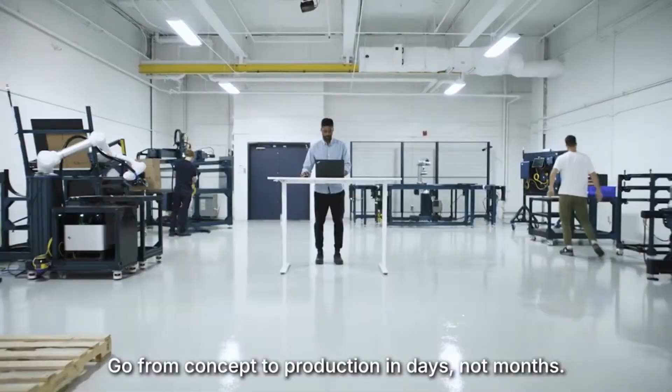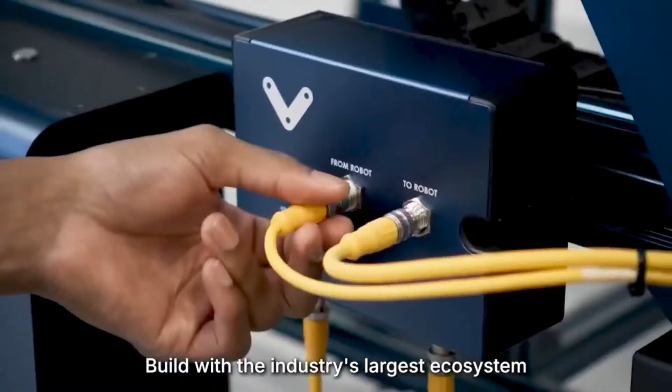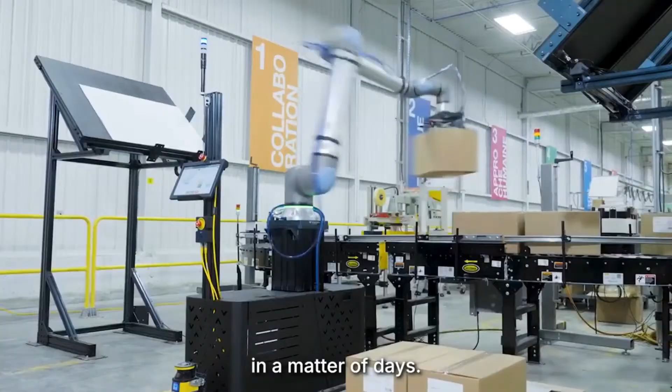When it comes to manufacturing, nobody automates faster than Vention. Design automated equipment right in your web browser. Go from concept to production in days, not months. Our drag and drop machine builder software allows you to design, program, simulate, and operate your system all in one seamless environment. Build with the industry's largest ecosystem of modular, plug-and-play parts, engineered for guaranteed compatibility. Or get started with a turnkey system, shipped pre-assembled and ready for operation in a matter of days. Trusted by more than 4,000 customers, big and small, worldwide, to boost productivity, cut costs, and drive scalable growth. Automate faster, scale smarter. Future-proof your business with Vention.

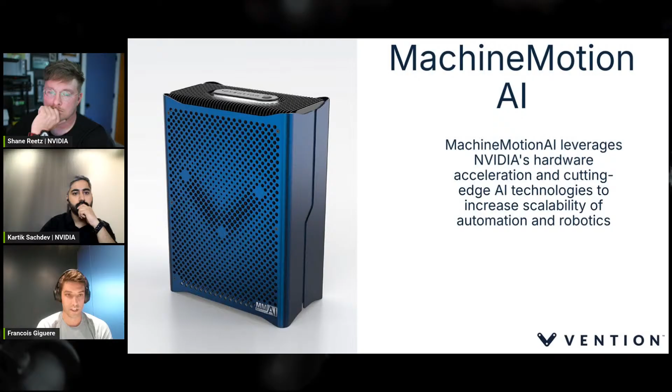If you go to the next slide, Shane, we'll see a little example of how the controller becomes the central part of a Vention system. We can connect robots, safety devices, IOs, motors. And the beautiful thing is you don't need to do complex engineering to make these things compatible.

It's a little bit like Lego Mindstorms, for those who know about it, or your Apple components at home that kind of seamlessly connect together. Everything is pre-configured, pre-discovered. You have software APIs for all these components, so it's very straightforward. That was our vision since the beginning, and we've made it more and more tangible and real as the business grew.

So with this 3rd generation, the special part is distributed motion control, but also the addition of GPUs. We partnered with NVIDIA early on the design of this new generation of the controller, and we brought in a Jetson NX 16 gig inside.

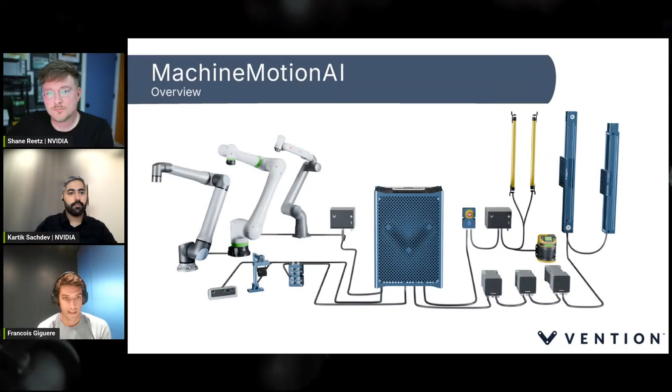If we go to the next slide, Shane, this little marvel of technology, about the size of a credit card, is now inside the controller. There's a lot of people that challenged me and challenged Etienne, our CEO, on why we were doing this. Some people say, oh, AI, it's just a trend, it's just to sound flashy. But what we wanted to do was simple.

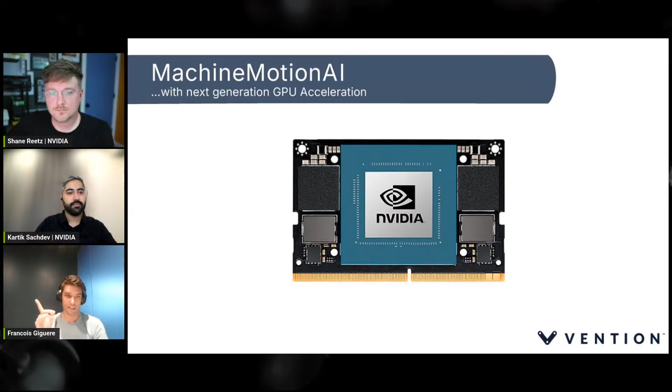It was to start to utilize AI to make the act of creating machines even simpler. And there's 3 things that we really wanted to push forward with this technology. The first two are about dexterity and perception - we want machines to perceive their environment much more easily, utilizing vision instead of, well, we made some crazy machines at Vention with like dozens of sensors to sense a part or which SKU was coming on a conveyor.

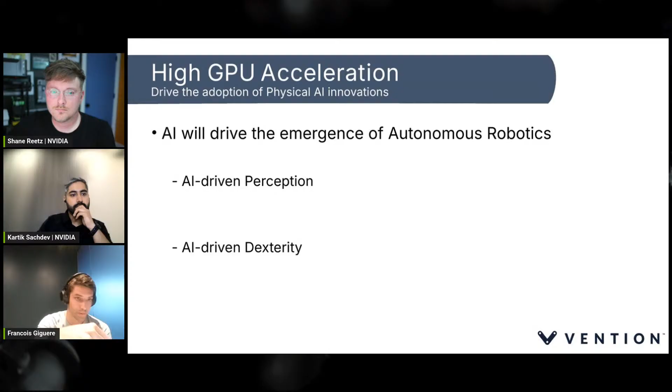But now with AI-driven perception, we can massively simplify things, right? We can simplify grippers, we can simplify mechanical staging devices and sensing. So AI-driven perception is one big thing that we wanted to push forward with GPU technology, GPU compute, and NVIDIA. And the other thing is dexterity, right? How do you go about picking a part? How do you position yourself to do so? So this is also another big field where we're pushing.

And if we go to the next slide, the other place where we really wanted to push is 3D-aware or context-aware motion planning. We don't want our customers to always have to create different routines depending on the SKU they manage, or depending on the context of the machine that day, or in a factory if there's a post. We don't necessarily want to always do something differently. So by leveraging cuMotion, a technology that was developed by NVIDIA, we can tell the robot, here's your 3D scene, go from this point to this point, and manage all the complexity that's in between these two points.

We were always of the philosophy that motion streaming is the right approach for the future, meaning that the controller of a system streams data points to a robot. And this ended up being very aligned with the technology that NVIDIA was building. So our technological strategies were really close cousins. So this was really seamless when the time came to leverage the technology.

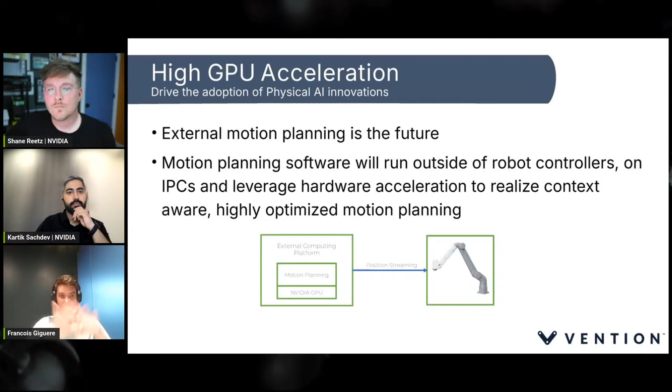So I just wanted to give an overview of Vention: low-cost machines, have them fast, make it easy, then put GPUs inside the central brain of the cell, and basically create perception simplicity, dexterity simplicity, and motion simplicity, right? This is where we're headed. And Jimmy, the fantastic scientist that joined us last year, will tell you more about exactly what type of technology we're taking from NVIDIA and putting inside our products to make this come to life.

Excellent. Yeah, and I'd just highlight for folks following along, if you hear us talking about this three-computer solution of physical AI, this is that third computer, right? This is the GPU at the edge. Absolutely. So you might use the DGX, we say, for training your model at a massive scale. You need like a supercomputer, and you're generating the models that are running these things. And then we have OVX running simulation, and then this is AGX. This is that edge, GPUs at the edge. So this is a really interesting combination of worlds with industrial automation and how do you get those resources at the edge.

So exactly. Kartik, are you going to show some of these technologies with Isaac Manipulator? Should we cover that next? Yes, why not? Now that you've talked about the three computers, here you can see we have the big cloud where we can train the foundation models. Some of them I already mentioned before, like FoundationStereo, FoundationPose. And also there's this GR00T model, which is a world foundation model for humanoids. So this is kind of like a cloud structure, maybe it can be on-prem, where you can train big models. It could be VLMs or LLMs, or any specific models.

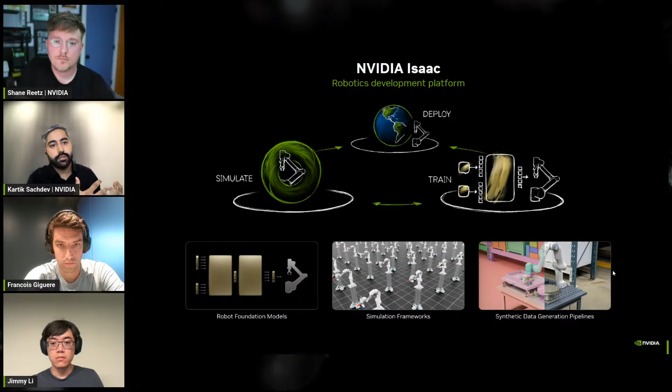So if you see, we have these foundation models, we have the simulation platform, and then augmenting it through synthetic data, we can really take these things to the next level. And that's one of the solutions that NVIDIA brings to the table on this front. So it's all a tandem, it's a loop. For instance, you trained a policy, then you want to evaluate in simulation how well it works before you actually deploy it. Once it meets your KPIs, then it's well and good. If not, you would do this loop again. So for this, we have these whole technologies.

So one of the applications which is also built is NVIDIA Isaac ROS. Basically, these are the CUDA-accelerated libraries and AI models that are freely available on GitHub. For instance, we have visual SLAM, 3D reconstruction, pose estimation, or object detection, and so on. These are all packages which are available on GitHub and via Isaac ROS.

Isaac ROS is built over the standard open source ROS framework with the CUDA-accelerated libraries there. These are all built on TensorRT, VPI, CUDA, Argus, and these drivers, and so on. To actually bring these models in a package, we have these reference architectures. For instance, Isaac Manipulator and Isaac Perceptor, and Vention here is one of the examples of Isaac Manipulator, wherein we are using these foundation models in actual deployment.

So let's see what Isaac Manipulator is. Basically, it's a reference workflow for autonomous manipulation, wherein we have 6D pose estimation and tracking. This is being delivered by FoundationPose that I've been mentioning since the start of my video. We also have a motion planning package, which is cuMotion. Then grasp identification, manipulation, and dexterity. All these packages come with Isaac ROS, or they're also available on our GitHub pages, and they can be deployed on our Jetson platform.

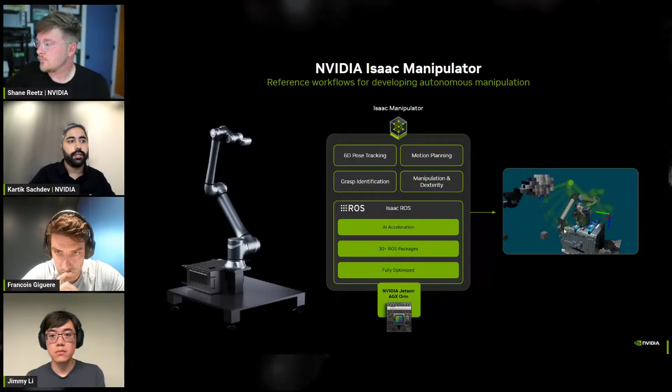Here you can see how these models actually look in the real world, wherein we have the manipulator doing a pick and place, for instance, and then it can do a 3D reconstruction of the scene.

So this is how the whole pick and place orchestration pipeline looks. We have the cameras. Maybe they could be in the real world, that's what we saw with Vention, or these cameras can actually be in a simulator, for instance, Isaac Sim. The moment the images from the cameras come, they go to the object detector. For that, we have SyntheticaDETR. This detects the object, meaning what kind of object it is, the type, for instance, if it's a metallic piece, like a blob, and so on.

Then it goes to the pose estimator as well, which predicts the 6D poses of the object in the real world. 6D pose means where exactly the object is with respect to the robot: the X, Y, Z, and the rotation about X, Y, Z as well. It also goes to the 3D reconstruction, which is called nvblox, and this reconstructs the whole scene, so what the surroundings of the robot look like.

So once these go there, we get what the object is. After this, we get the pose of the object. Once we have the pose, we command the robot to go and get the action done. That's how the whole pick and place pipeline, or architecture, looks. And all these things can be deployed on our Jetson platform, or on discrete GPUs.

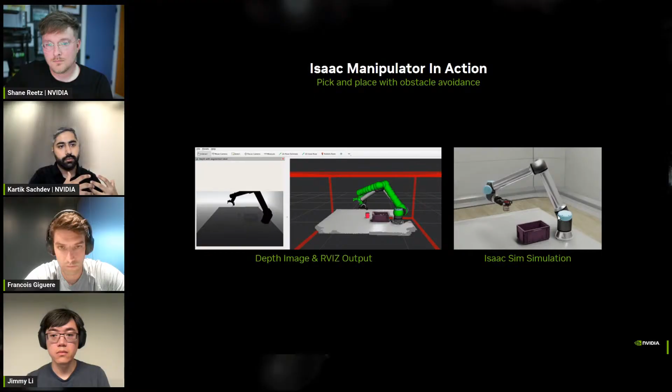So with all this information, like what I presented before with cuMotion, FoundationPose, FoundationStereo, and these libraries, we can get a feel of the environment, and then the robot goes there, grasps, and avoiding the boundaries of the box, places it inside the box. So that's how Isaac Sim works in tandem with RViz, or with any standard ROS framework.

And since these things have been exploding a lot, there are a lot of new things coming up very fast, very soon.

So we have a lot of courses, and also reference architectures, documentation, codes, so that we give the power to the hands of the developers to make great things from our reference architecture or the work that's already been done, instead of each developer building their own wheel. So, and why not? We have these tutorials, the concepts, and a lot of things.

And also there are developer forums wherein the developers are free to open up for discussions. If they have any feedback for us, feel free to give feedback on our libraries, on our tutorials, or on our packages. And there we can inculcate that. And that's how, let's say, it's a learning machine, and then we grow together. So talking about the courses, why not, Shane, you talk about some physical AI and robotics fundamentals that we have and we offer to the community there.

Yeah, sure. Well, first of all, I just want to say thanks so much for going over that. There's a lot to digest in that, but I think each step of that pipeline is like an interesting tool that's worth its own exploration. I mean, just foundation pose, being able to estimate the pose of an object in space, its position and orientation. There's so much you can do with that, and that's one part of it, right? So I think it's really worth taking a deep dive and looking into these.

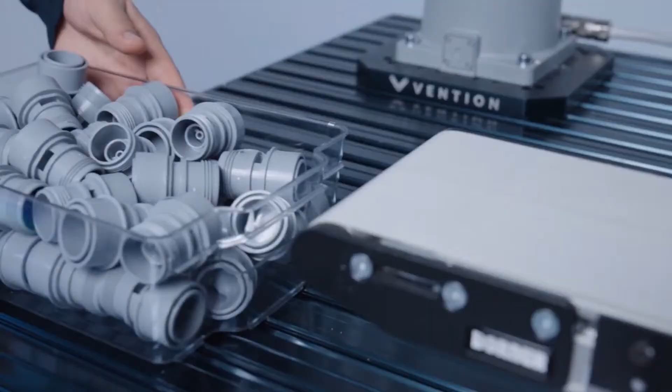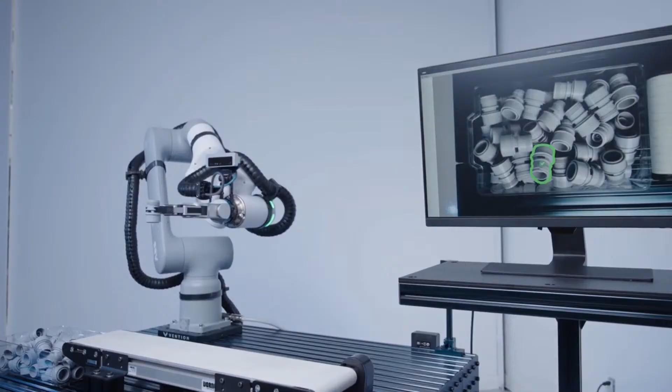I'd like to start by showing a video demo of something similar to what we presented at GTC this year. This was also shown at Automate and Automatica. So here you see a robot that is picking this gray part. It's a plumbing part from one of our potential clients. And as you can see, the parts are randomly placed inside a bin. And the robot is able to pick up these parts and place them in a structured way.

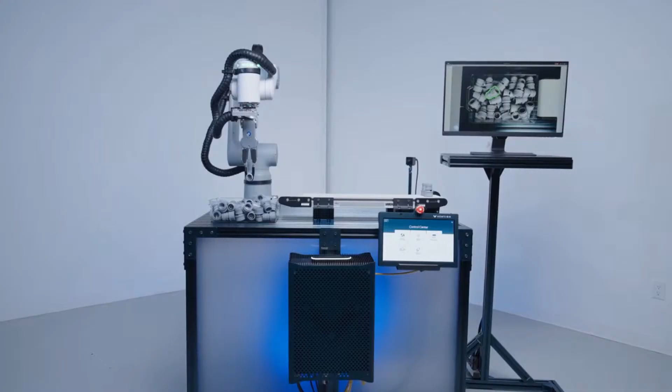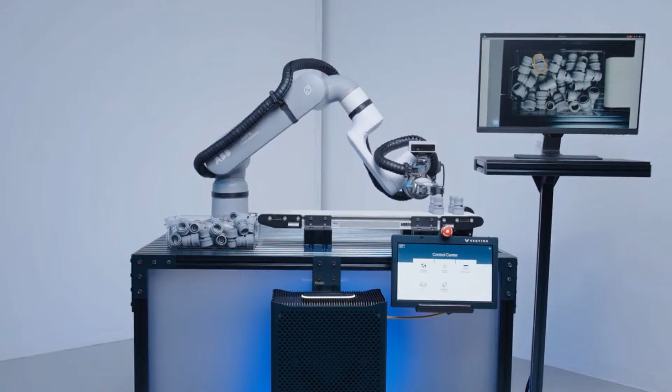So at the core of this demo is NVIDIA's foundation pose model, which enables us to use vision to estimate the pose of these objects in 3D space. And there's a camera that's mounted on the wrist of the robot, which is used to see the objects in the bin. By the way, when I say the word pose, what I mean is the rotation and the translation of the objects. And for this demo, all the processing is happening on board Vention's MachineMotion AI controller with the NVIDIA Orin NX.

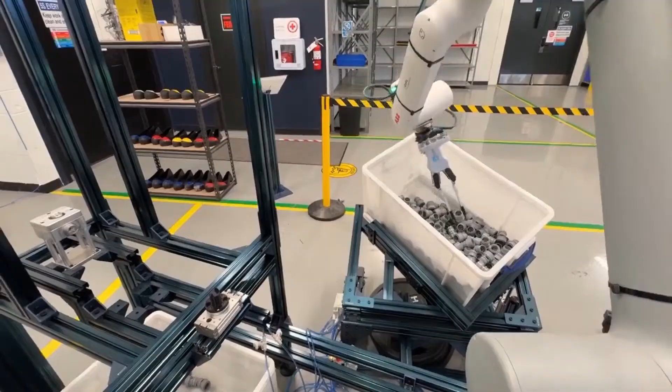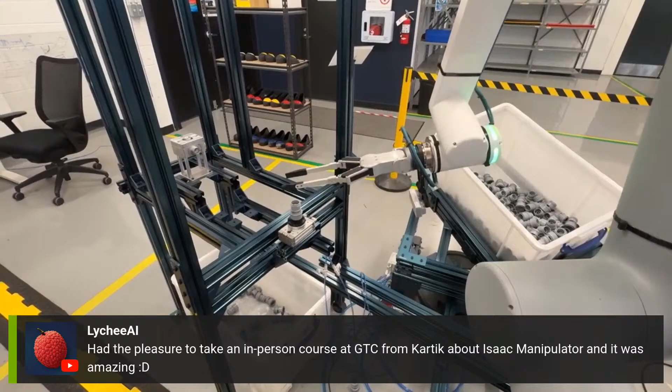Okay, so that was just a demo. So next, I have another video of the actual cell. So this is a test cell that is built with the same dimensions as the real cell at our customer site. And what you see here is a bigger robot. It still has a camera that's mounted on the wrist, but there are some key differences here. So first, you see that we have a very deep bin, and this poses a lot of challenges. Because there's a very deep bin and the robot's hand, its gripper, is quite big, we need to be able to avoid collisions with the bin. That's very important.

And one other thing that you'll notice is that now, compared to the demo, every single time we pick up the part, we're holding the part slightly differently. And because of that, the way we place it is also different every single time. And this is important because when we're picking from a deep bin like this, there are a lot of constraints that we have to work with, right? We have to not hit the bin. And then also depending on how the part is oriented in the bin, not all the grasps are available. And on top of that, we have to pick it in a way such that we can actually place it in the way that we want.

So the strategy here is for every object, we have a large pool of candidate grasps that the robot can use. And then depending on the situation, the robot will make a smart decision about which of those picks to use.

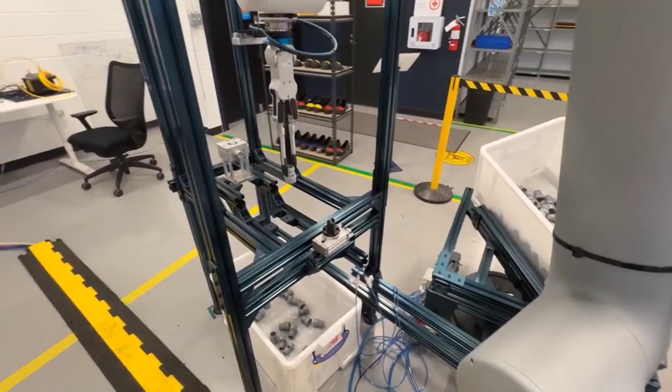Right, so next, do you have the longer version of the video, Shane, that we can play? Let me see here. Got a long version of the demo I'll show. Awesome, thank you. Let's pick up at the end, yeah, this is where it was ending.

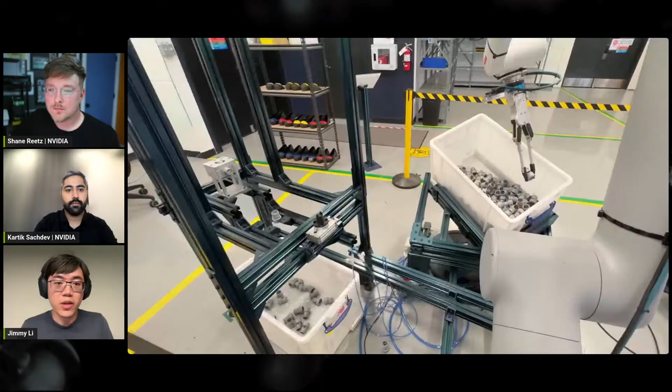Okay, great. So this is a very long 24-minute run of the robot just picking this part. Just now I think we saw the first 3 minutes, but this is the full length of the video. We won't watch all of it, but we'll watch it while I talk about this cell.

Okay, so another thing you'll notice is that we have this regrip station. By the way, the regrip station is that black thing there, and now the robot is about to put it on the regrip station. Yeah, now it's on the regrip station.

So the reason we need this is that there's very limited space inside the enclosure for the final receptacle that we have to place it into. And so the only way for the robot's arm to fit into this enclosure is to pick it from the top. That's why we went with a regrip station.

And this regrip station is actually performing another role, which is that when the part is placed on it, there's a mechanism that rotates the part and turns it so it has a consistent clocking. This is important because to finally insert it into the receptacle, the part needs to have a correct clocking.

So in this video, oh yeah, this is the shaking of the bin. Whenever the robot fails to pick a part, we actually shake the bin just to mix it up and expose a different set of potential grasps that the robot can then consider.

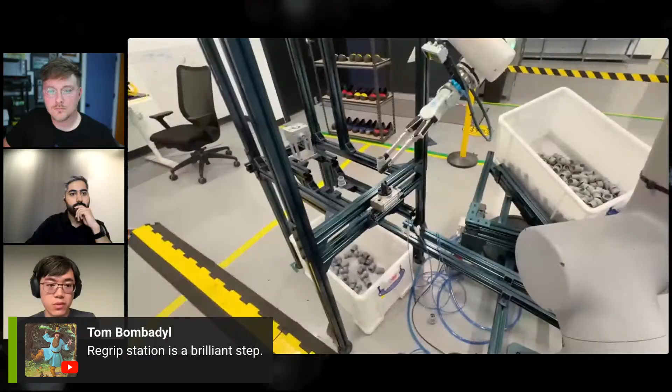Now here we actually take it back out and drop it into a bin below, and that's just for testing purposes. For the real deployment at the customer site, once the part is placed inside the receptacle, the whole receptacle will actually move away for the next processing step, and a new empty receptacle will come into that position, so the robot can then put the next part in.

Wow, I mean, I know we said we weren't going to watch the whole video, but I think I could watch the whole video. This is really, really fascinating. I haven't tried this kind of thing. I mean, this is a difficult problem. That bin is not, as Jimmy mentioned, it's deep. You have all these objects just tossed in there in different orientations, and it's dynamically figuring out how to pick these up. I just need to emphasize how wild that is. And I could just watch this all day, but please go on, Jimmy.

Yeah, so I just wanted to mention that random bin picking is one of the toughest problems to solve in the manipulator ecosystem. Because if you see, most industries have a very organized or semi-organized way of placed objects, where they want to pick it. But the real problem and the real challenge really comes when you have random parts, and this is a very common scenario in industry. So solving a very hard problem definitely takes time, but if you have the right partnership, you can really take these things to the next level. Whenever I see this demo, it's really impressive. So yeah, over to you, Jimmy.

Just wanted to add this thing. Actually, if I can butt in with a small question, do you know what would be needed to take this from this particular part to a different part? Like, let's say you get a longer version of those connectors, what would be needed to change this behavior?

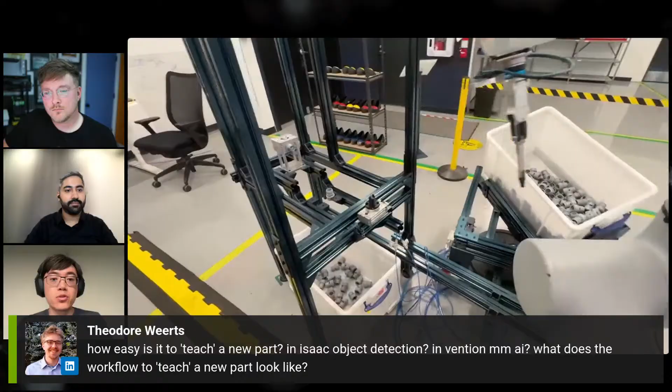Right now we're testing with these plastic fingers, and sometimes they'll break. Let's say we try to grab one part, but there's a nearby part, and the finger goes into the barrel of the part that's nearby, and that could lead to an unsafe collision. So that's still a problem we're actively working on.

So now to come back to your question, Shane. If the parts in the bin have certain physical properties that don't cause too much problems, then it could be quite easy. And the cool thing with these foundation models like Foundation Pose is that we don't have to train it on a new part. All we have to do is provide it with a new CAD model of that part, and right away it's able to detect it. The only other thing we'd have to do is program some of the grasps.

And we are exploring ways to automatically generate those grasps based on a CAD model, and I know NVIDIA is also doing work on that. In the past, there have been cases where it only took us a day to onboard a completely new part, and that's once again due to these foundation models not needing to train.

Now, where it can get hard is that because we haven't fully solved this dexterous grasping problem, let's say you give us some other kind of part with physical properties such that it's very hard to squeeze your fingers in between parts. Maybe the parts are very heavy, or such that when you put your fingers in, they don't naturally spread out. Then we could run into problems. I'd say that's still kind of an open research problem that we don't yet have a great solution for.

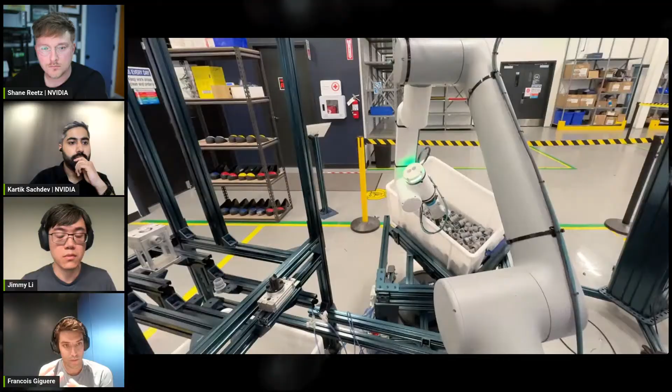The other portion is we see a path to automating grasp planning. We're not there yet, like Jimmy said, but we truly believe that with the tools we have, including the second simulation computer, we can get to a point where for each new part you add, you don't have to reteach the valid grasp points. You can have an automated, simulatable step for this. So you go from a world where you need to choose every grasp, train every part, and refine with field data, to a world where grasps are automatic and adding an object is as simple as uploading a CAD into the pipeline. This is really a game changer, aligned with faster to market, lower cost, and more straightforward.

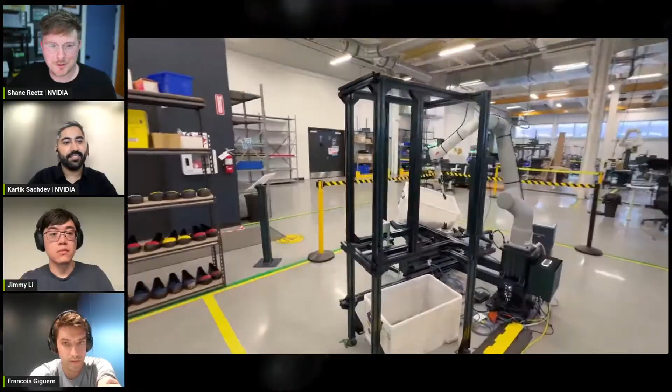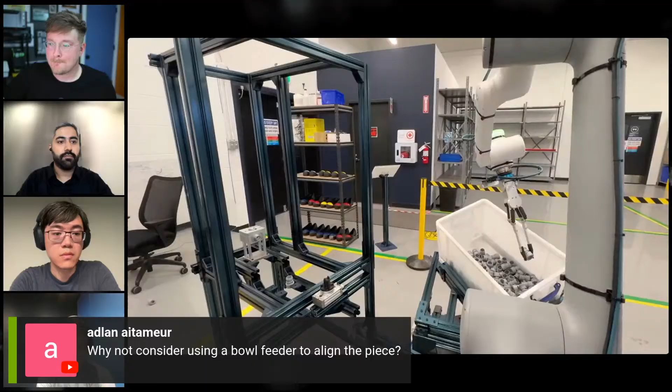Comparing this with traditional robotics, this would be difficult—it'd be a huge reprogramming effort to make something like this work with a new part. A gentleman in the comments was talking about bowl feeders. Bowl feeders are great, they've been used for decades, and they're effective, but highly inflexible. If you're machining millions of bolts a day, it makes sense for the volume, but the situations we encounter in our customer base always involve a new part—the SKU mix is very varied. So having a bowl feeder is difficult for a very large SKU count. You need something much more flexible, which is the type of solution we're showcasing here.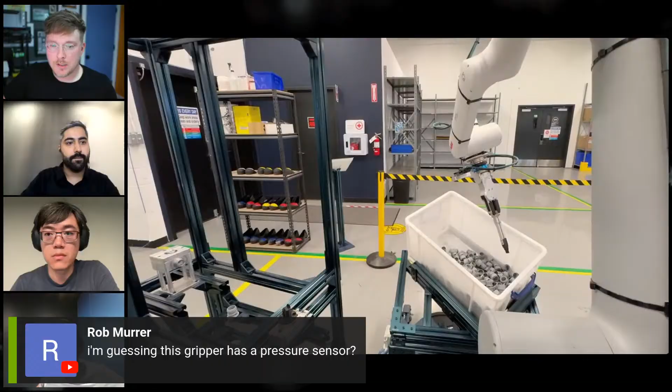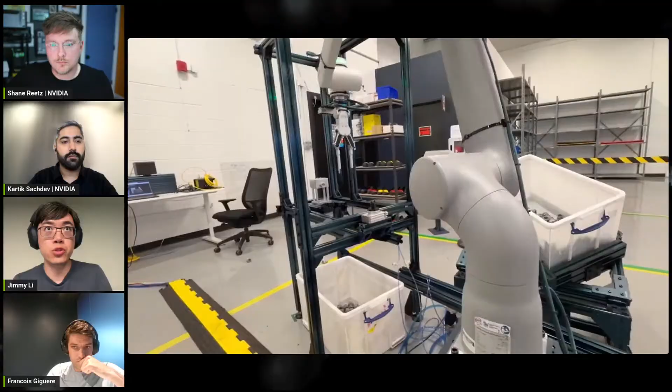Rob had a question about the gripper—how it decides how to grab and how far to grab. Is it pressure? Is it torque? How does this work? Currently we have some grasps that we manually coded. Given the CAD model, based on a manual analysis of the part, we write a Python program that generates those grasps. Eventually, there are a lot of grasp samplers out there we can use to automatically generate these grasps, and I think that's what we'll move to eventually.

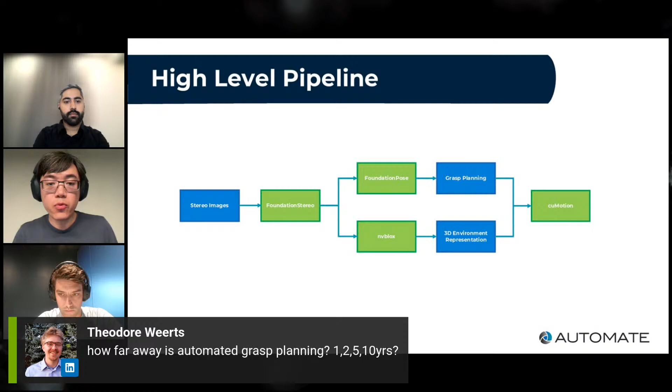So this is a motion planning library from NVIDIA that leverages the GPU. So this is able to take advantage of the collision model created by nvblox to plan a collision-free path through

the environment for the pick and the place. And the cool thing about cuMotion is that we're able to plan many things in parallel on the GPU.

And that's important because if you remember earlier, I mentioned that we have to consider many candidate grasps to find one that doesn't collide with the bin, that fits with the object geometry in the bin, and also in a way that we can place it later, right?

So we have to consider many different grasps, and being able to do that in parallel on the GPU is very advantageous.

Excellent. Okay. Yeah, really interesting to see how all these parts can come together. And I think we've got another video that shows more the inner workings and kind of visualizes what's happening. Should I pull that up next, Jimmy? Yes, please.

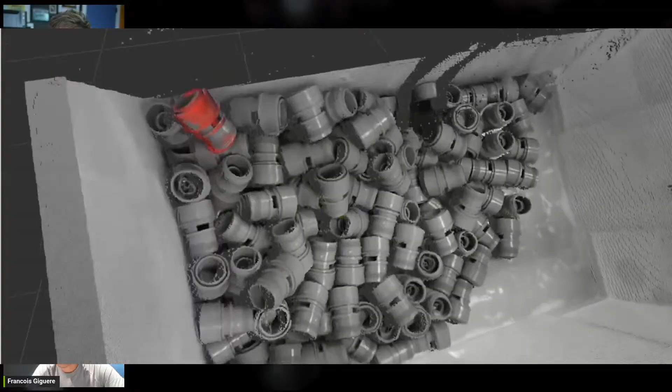Okay. So in this video, you are looking at a demo of both foundation pose and foundation stereo. So just take a moment to take in the quality of this depth that is captured. That is computed using foundation stereo, right?

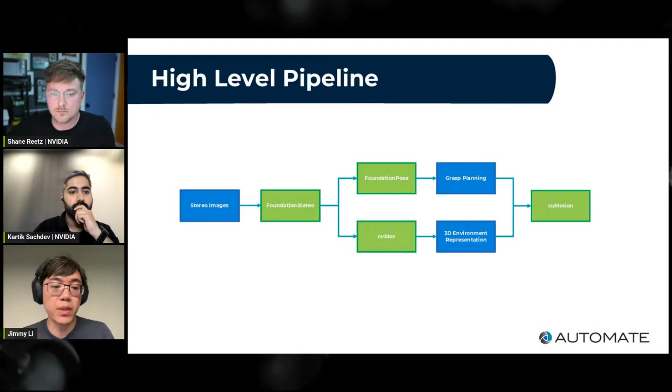And this was not possible previously using traditional stereo matching technologies, right? So foundation stereo really unlocks the ability for us to have high quality depth with a very inexpensive stereo camera.

And also, Shane, if you could play that video one more time. At the top left in red, what you see is the output of foundation pose. So there we estimated the pose of that object, and then we plotted the mesh of the object in red.

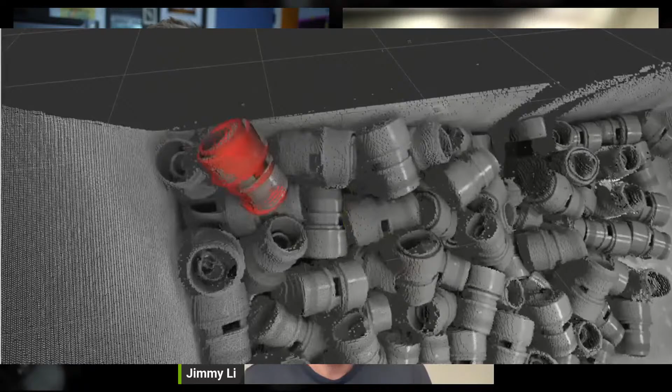And as you can see, it lines up quite well with the depth. Yeah, this is really impressive. This came from, you said it was, how much was this camera?

It's about $500. Yeah, and that's really, really high quality data. That's impressive. Okay, so we can go on to the next video.

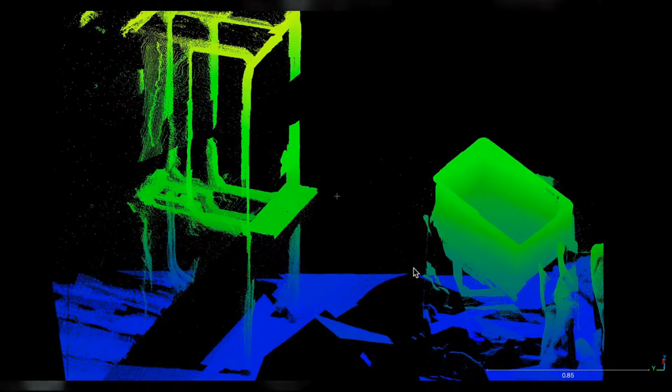Okay, so this is a big point cloud that we've stitched together. So this is, in a way, it's also a demo of foundation stereo. Okay, so we have a bunch of very high quality depth images, and then we stitch them together.

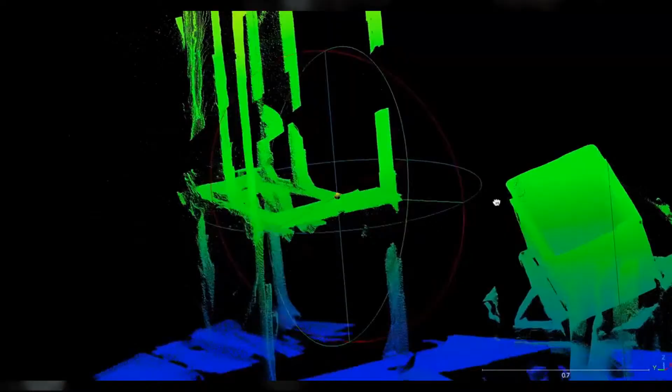And so here you can see it's like basically our test cell, right? It's a scan of the environment, and this point cloud is then given to nvblox to build a model of

the environment, which we can then give to cuMotion to plan through this environment. Excellent. And then I think we have one more. Yes. Final demo here. Yeah.

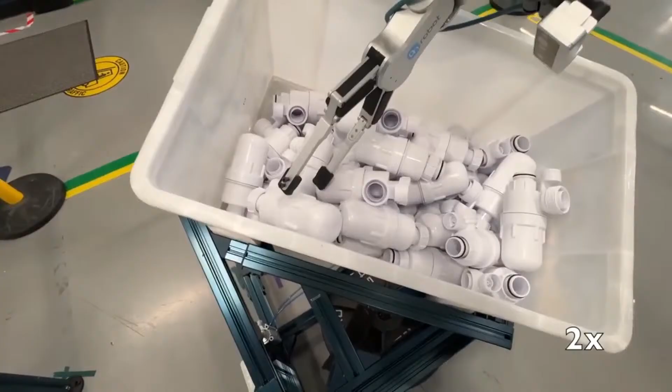So here we see the robot picking a different plumbing part. It's from the same client. It's also a plumbing part. So for example, this part we were able to onboard very quickly, right?

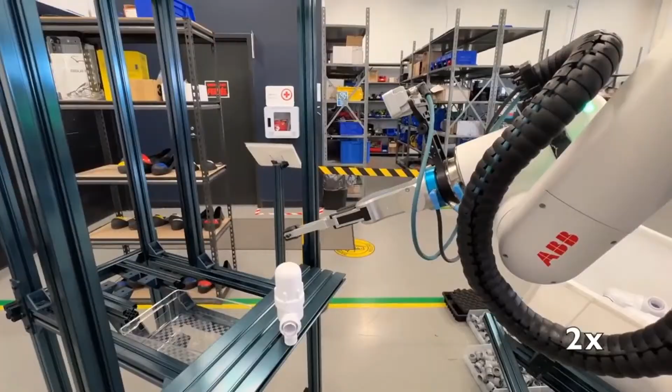So within a day. So I think, yeah, like within like a few hours, we were able to start to pick this part. And this part is actually a bit easier to pick than the gray part.

It's bigger. There's like more space between the parts. And yeah, so this was quite easy for us to get up and running.

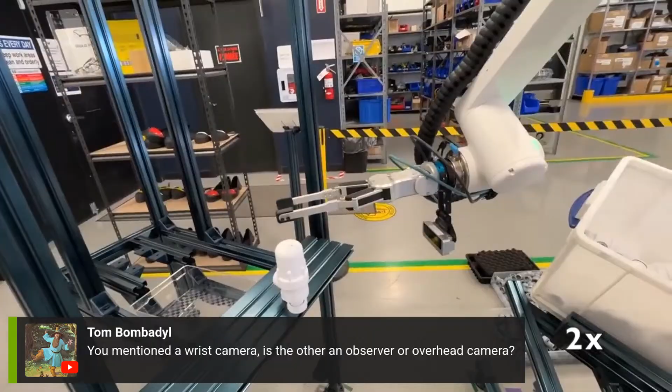Wow. And I had a quick question from Tom here, just while we're looking at this. It's just the camera on the wrist, right? Is there any observer camera in the system? No, just the camera on the wrist. Just the camera on the wrist. Okay. Yeah.

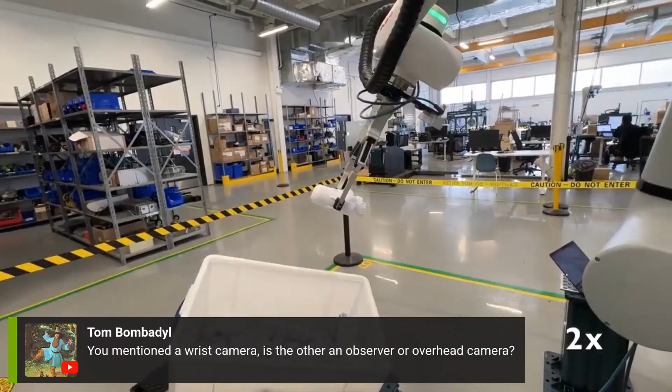Wow. Yeah, this video is playing at 2x speed. It is an older video that we took a while ago, but the one that you saw earlier was 1x speed, was the actual speed.

Very cool. Wow. Yeah, I'm mesmerized by robots. I don't know if that ever gets old, but watching processes like that and watching it figure out a different grasps and its ability to adapt. And like before, watching some of the orientations the robot could get into to get a grasp, it's really dynamic.